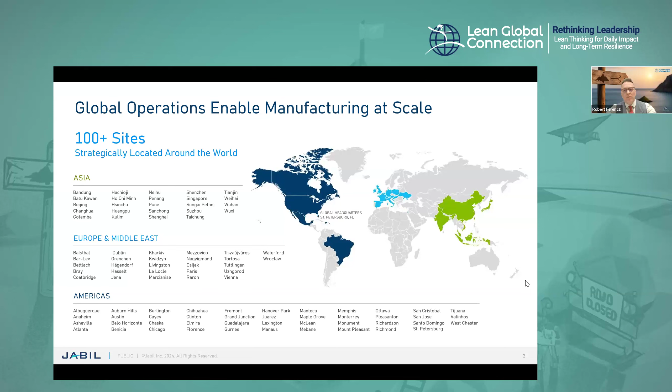Let me say a few words about Tiszaújváros, because this site is the largest contracted manufacturer in Europe, and we are in the top 10 in the world under the Jabil umbrella. We built strong relationships with 3 universities within a 70-kilometer range, and we are 5 hours from most European cities.

Our capabilities: we've got design for sure manufacturing, test, automation, environment like clean room, quality lab, and innovation capabilities. Within manufacturing, SMT, automated, hybrid automated, soldering, press fit, screwing, and many more solutions available for production. We've got customers from automotive, industrial, telecommunication, healthcare and consumer sectors as well. We are committed to improve better and better solutions to serve our customers.

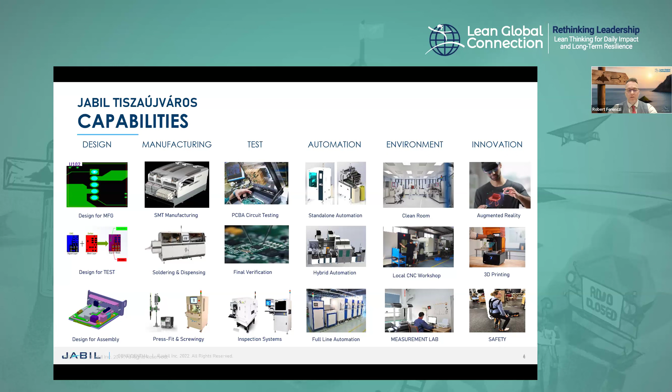Today, I would like to introduce one of our great projects from the thousands in Tiszaújváros. The purpose of this project is to use a different approach to build a selective soldering process. When a new automotive business was introduced in Hungary, we faced several challenges. We took into account all of the circumstances, and we recognized the old way to use soldering pallets with an extremely complicated method cannot be followed. We saw huge risk in it, and that is why we started to think of a simpler and more cost-effective soldering solution.

What are these circumstances? No touch, no rework allowed in the production area. That means only the first pass product is the good product. The most critical thing is to reduce the occurrence of errors from a quality standpoint. Pallet handling process is complex, manual, even in an automated way. Cycle time is defined in advance. Cleanliness requirements were not installed before in Tiszaújváros, and the optimized production area was a good opportunity for cost reduction.

How did we achieve it? We had to step back and wait a minute. We wanted a stable and sustainable solution. So we totally removed the solder pallet returning system and replaced it with a built-in solution, meaning only one piece pallet is needed, which is part of the selective soldering machine like any other component.

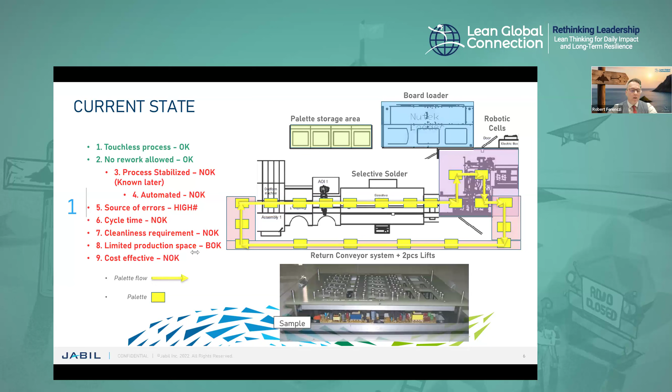The most common and critical point here is the solder pallets itself, and the additional processes that keep them in good condition. Currently, the cleaning and maintenance is 100% manual, meaning visual inspection, component replacement if necessary, and all of these need to be done.

out of the clean production area. That causes additional handling and requires spare parts on stock for repair. 20 pieces of pallets continuously need to be in good condition to keep the line capacity.

Furthermore, the pallet can bend during usage, and that can influence the quality of the soldering. The maximum allowed flatness is less than 100 microns here.

I was a quality engineer before, and I have personal experience from other automotive businesses because the pallet is a nightmare when a soldering related root cause needs to be found. So the additional process means more risk, higher occurrence of failure, even more cost.

So our question was how we can avoid the above mentioned circumstances and make our life much easier. So that is why we had an idea how we can integrate the PCBA support into the selective soldering machine.

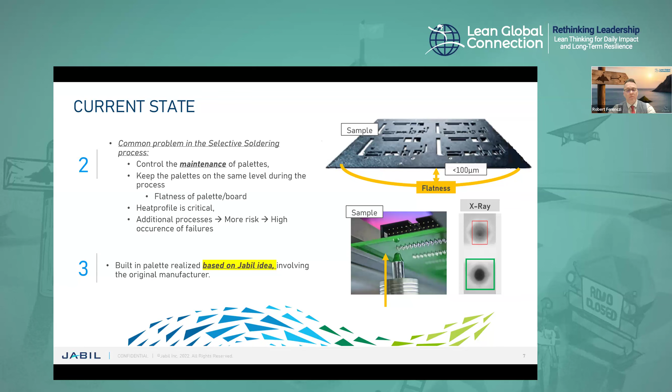Our contracted supplier's version did not meet our expectation, but one of them found a way to start to work with us to build the inner pallet idea into the selective soldering machine. After several meetings and negotiations, the final version of the inner pallet is realized, and let me describe how this works.

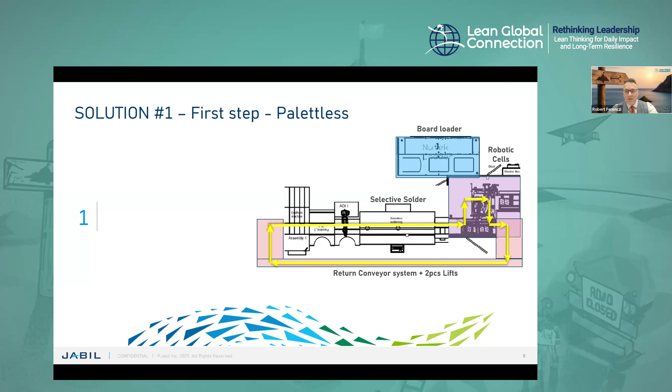With this solution, the following processes and/or machines became unnecessary. Previously, I removed the pallet storage area, but what is not necessary now?

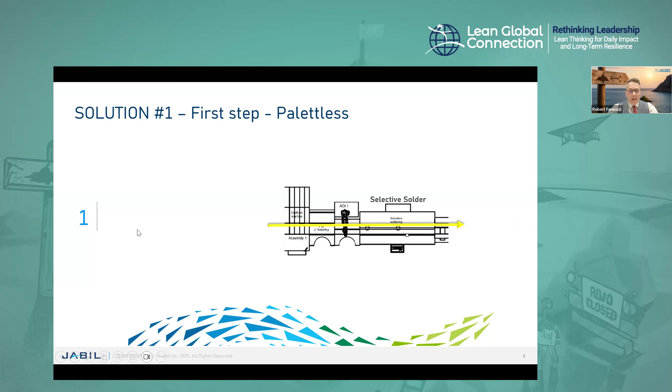The board loader, also robotic cells, return conveyor system with lifts - what has remained is a straight, simple solution where we do not need operator interaction. More than 80% of the potential failure source removed, production area reused, much more cost effective, and more effective from an operational standpoint as well.

So the traditional way of layout became a very simple line, and now only one pallet is built into the selective soldering machine instead of an external multi-pallet. Furthermore, all additional pallet handling and maintenance are not needed anymore. The revolution here is to keep everything under the same control in the selective soldering machine maintenance.

But as you can see, we were still not at our goal. This solution was just the start. This was the point where we started to make the process perfect.

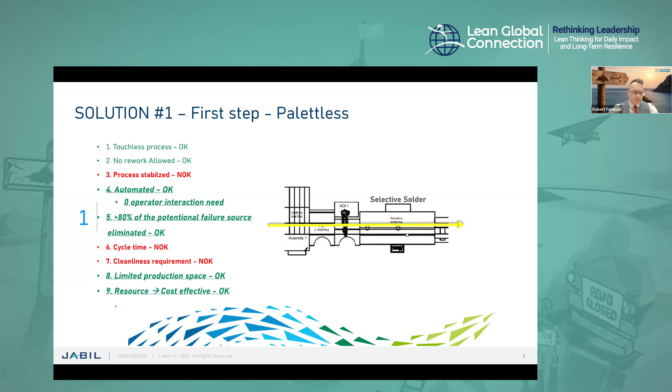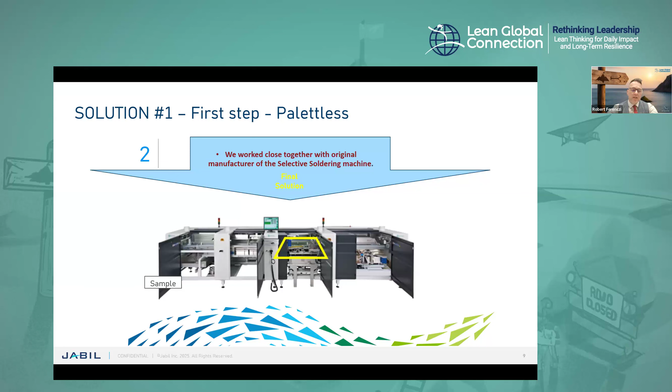The final inner pallets solution can be seen in the picture below, and it can be shown how it fits into the selective soldering machine. In all cases, we need 2 pieces because our machine has got 2 solder bus. As I mentioned, we have remaining few findings to solve.

The first was the cycle time. Based on the measurement, the current cycle time was 42% above the target. So we started to modify the process steps.

The first part was easy because it's clearly visible the solder head movement in the solder bus was too long. After the change, we reduced cycle time by 33%, but that was not enough yet. So here you can see - this is an example - what we made before and what we modified. This is the way how we saved time.

We had to dig deeper because the last 9% was the hardest part of the problem. Only one factor change was not enough to reach the results.

So the solution was to reduce the contact time between the solder head and the PCBA surface, and in parallel, rebalance the work content between the solder bus. Additionally, the biggest and heaviest components were prioritized during the soldering process, where more layers are in the PCB.

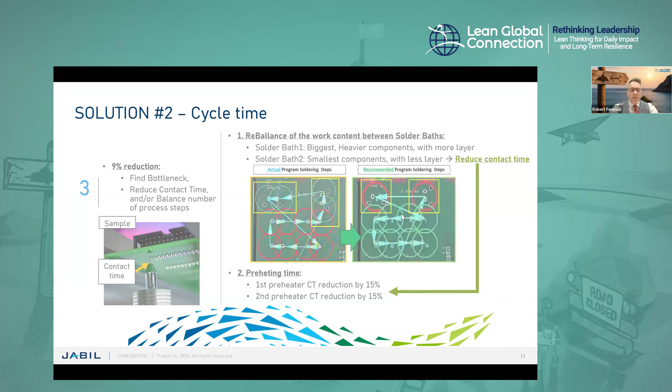Therefore, we were able to reduce the previous process step cycle time, the preheating, and that led us to the final cycle time reduction. So we were happy because one more obstacle was overcome, but as you can see, this solution was not sustainable yet.

This product was a prototype in this phase, and based on customer feedback, we had to further reduce the flux residues on the board surface. But this reduction caused instability in the barrel fulfillment because less flux caused insufficient solder around the through-hole component legs. So you can see what was the result and what we had to achieve.

So in this case, we took our lean knowledge again and checked several potential root causes, and we found the solution in the component and chemical data sheets.

The soldering temperature was barely above 145 degrees, and that temperature overburned the flux quantity, causing it to disappear from the critical surfaces. So several heat profiles were measured, and we found the right temperature level. The heat profile modification and the previously mentioned rebalanced work content together gave the final solution.

X-ray is the next step after the selective soldering, so we were able to check piece by piece the outcome of the modification.

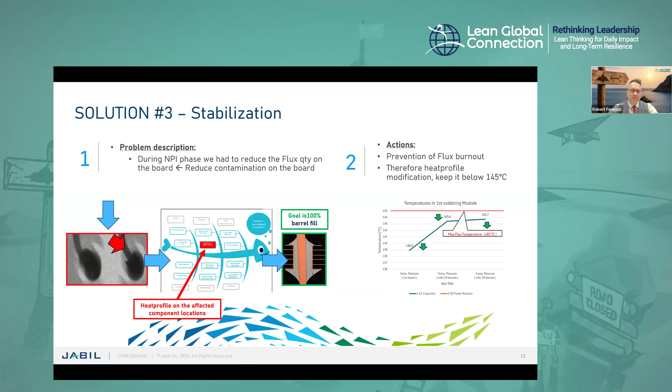So as you can see now, we already stabilized the process and our capacity was enough, but one of the main parts is still missing: the cleanliness. Why did I say this?

Because it has been clearly identified at the beginning of the project: even if we are perfect, all of the KPIs at 100%, or if we have zero scrap, the cleanliness is a go, no-go criteria to turn the production to SOP phase.

Before we even started to produce anything, we had to build our own cleanliness procedure. And to be able to understand where we are regarding the particles, the measuring method had to be identified.

So the measuring method was established, and now we can see the results of all actions, because to reach the level of the technical cleanliness requirements, several actions had to be done.

Covered and separated production area, touchless production, changing the employee mindset across several trainings and leading by example, cleanliness rules with clean workloads, and continuous measurement.

And this quality control led us to find the last piece of the puzzle to reach all of our goals. The quality lab was able to identify the size and the origin of the metallic particles, and we found that the maintenance plan in the selective soldering had to be reviewed and modified.

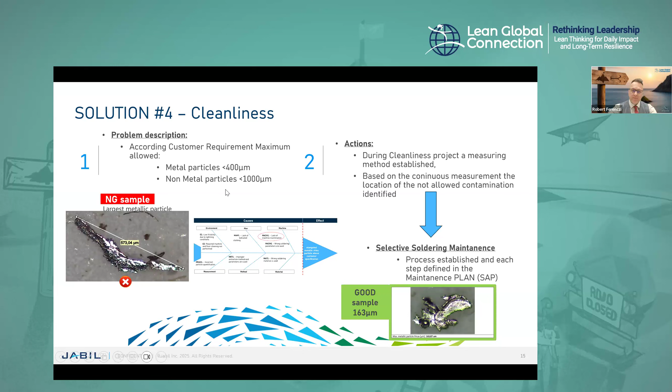After the modification, for the past 8 months, we were able to keep the contamination under the limit. It means now we have a stabilized, sustainable, cost-effective selective soldering process with an innovative built-in pallet solution.

What is the business impact here? So the first pass yield now is 100%. The scrap is zero. We launched several A3 projects to reach these results. Cleanliness requirements passed continuously and the customer is satisfied.

But one of the most important things is that the manufacturing team is more than engaged because they received a well-made engineering solution to build products of good quality. Just a well-defined maintenance needs to be done by them.

The future opportunities are another great part of the solution: the process is reversible. Why is that important? Imagine if a business has a wide product portfolio with 100 different kinds of part numbers and uses a selective soldering process, but does not want to invest a lot of money into the project at the same time.

So they order only one piece of inner pallets, make a trial run, and if that is successful, the rest of the pallet order and the trial production can be scheduled financially. But why? Because the changeover between the traditional and the new inner pallet is around 2 minutes or below.